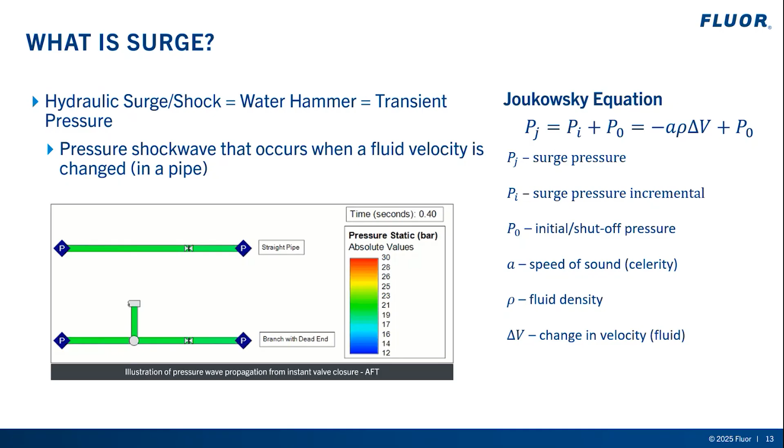Thank you, Phuc. Surge events like fluid hammer and vapor collapse aren't just theoretical risks. They cause real-world safety incidents and financial losses, especially in complex pipeline networks with varied configurations. But here is the dilemma.

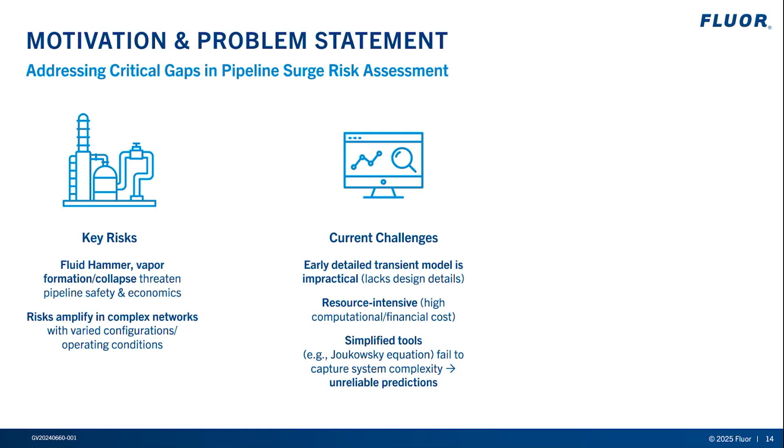Early design stages are when surge risks must be identified, yet this is when we lack detailed data for full transient modeling. Running high-fidelity simulations for every pipe section is prohibitively expensive and time-consuming. So engineers rely on simplified tools like the Joukowsky equation, but this ignores system complexity, leading to unreliable surge predictions and band-aid mitigation strategies. Our core question is, how can we rapidly pinpoint surge-vulnerable zones during conceptual design without costly modeling?

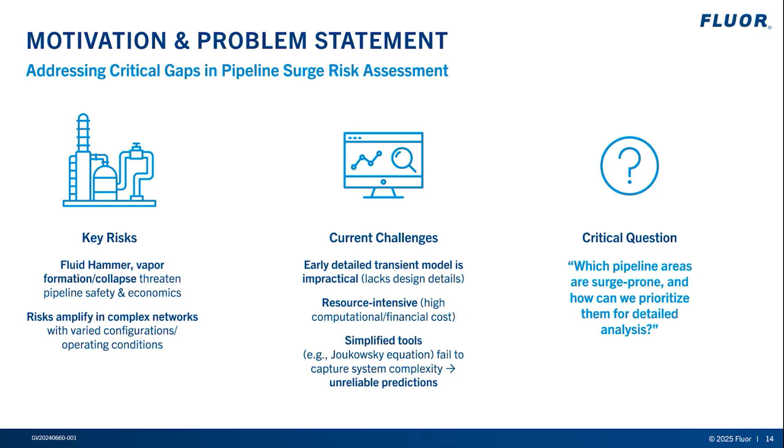We try to bridge the gap with a deep learning tool trained to predict surge magnitude and location using physics, not guesswork. Unlike traditional methods, our AI accounts for interactions between critical parameters, such as diameter, valve dynamics, and network layout, delivering holistic screening. Now, why distillation?

With field surge data, it is near impossible to capture shock waves, and measurements are noisy. Instead, we generate high-fidelity simulation data based on hydraulic principles to train the AI. This avoids data uncertainty while transferring physics-based knowledge. Think of it as teaching the AI with precise digital twins rather than flawed real-world observations. So let's highlight again here. What we mean by distillation is that we are transferring knowledge from high-resolution simulations, our teacher, to the lightweight AI model, our student.

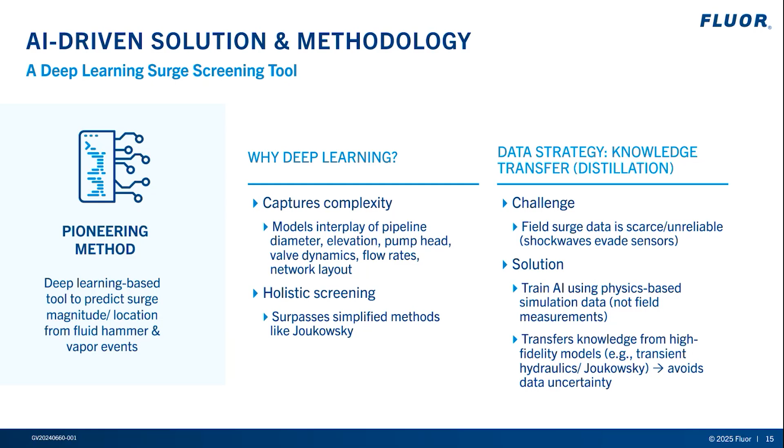Again, why simulations? Fluid hammer events last milliseconds. No control system reliably records them. Simulations give us clean, controllable data. Let's validate with a focused case, valve-induced surge. We reduce the complexity using two non-dimensional parameters: tau, which is the valve closing time versus sonic wave reflection time, and eta, which is the simulated surge pressure versus Joukowsky prediction. Our simulations reveal eta and tau share a polynomial relationship.

Crucially, we quantified uncertainty propagation. Variations in tau directly impact eta's reliability, with the equation shown here. This isn't just math. It tells us how confident we can be in AI prediction when real-world inputs are fuzzy. Next steps: scaling this framework to include pumps, network effects, and more parameters.

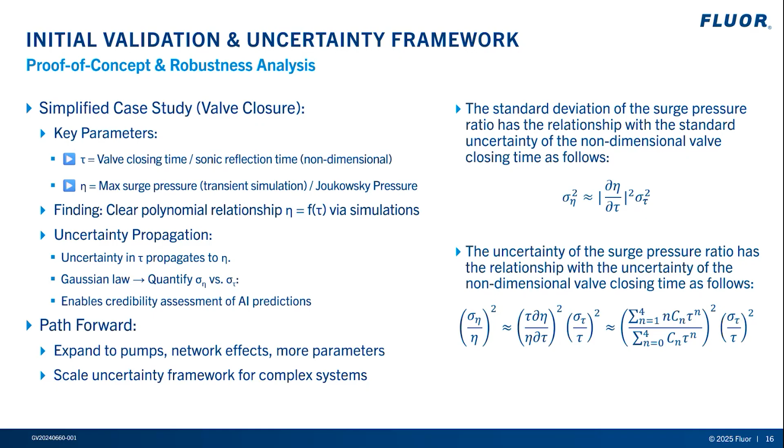Let's highlight again here our key technical contributions. First, we utilize non-dimensional parameters based on the rule of similarity. We introduce tau, a non-dimensionalized valve time that enables us to generalize across pipe length, diameter, and fluid properties. Second, we utilize the Gaussian law on uncertainty propagation. The Gaussian law shows how input errors propagate, which is vital for judging AI's real-world credibility.

Now back to you, Phuc.

Thank you, David, for our motivation and methodology. Next, moving into our simulation and development, going from what we do in the simulation model to how we develop it in our deep learning tool, then to present our findings and validate the accuracy of our machine with uncertainty propagation. Lastly, to describe the study's constraints and set up for our future work.

For our simulation modeling, Synergi Pipeline Simulator, or SPS for short, by the company DNV, is the simulation software of this study. SPS is a robust, steady state and transient analysis software for pipelines. It is widely accepted and in many cases preferred within the industry. The depiction shows a very simple and very basic setup within the model. You have an origin or source of fluid connected to a pipeline with a valve at the end of the line leading to the destination as the reservoir or sink.

In this study, we consider a typical pipeline with common parameters of design. The pipeline is transporting water with diameter set at 20 inches, length at 20 miles, wall thickness of 0.25 inch, inlet pressure at 750 psig, outlet pressure at 150 psig, because pressure moves from high to low. Material of carbon steel, and the only variable we are considering is the valve closing time.

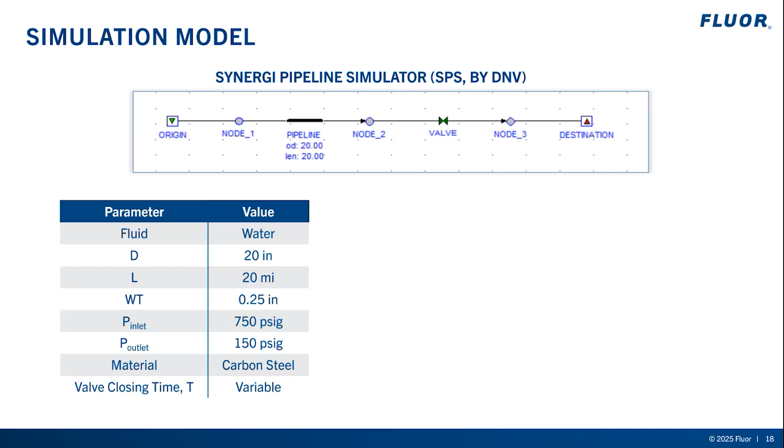We study 4 types of valves: ball valve, gate valve, linear valve, and globe valve. Why? Each valve has a different opening and closing characteristic, which is the major factor of flow control with respect to time. The steeper the slope, the more aggressive closing of the valve. These 4 valves were chosen based on the most common types of valve in operations. From the simulation, we generated 10,000 data points for each of the 4 valve types, for a total of 40,000 data points. I will now pass it over to Liang for our machine learning development.

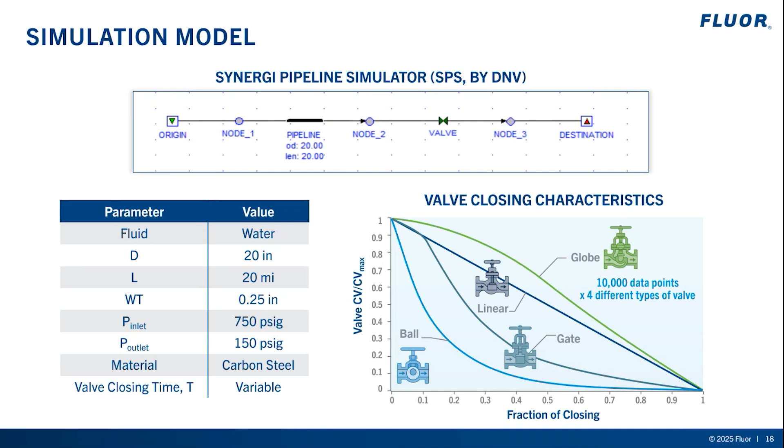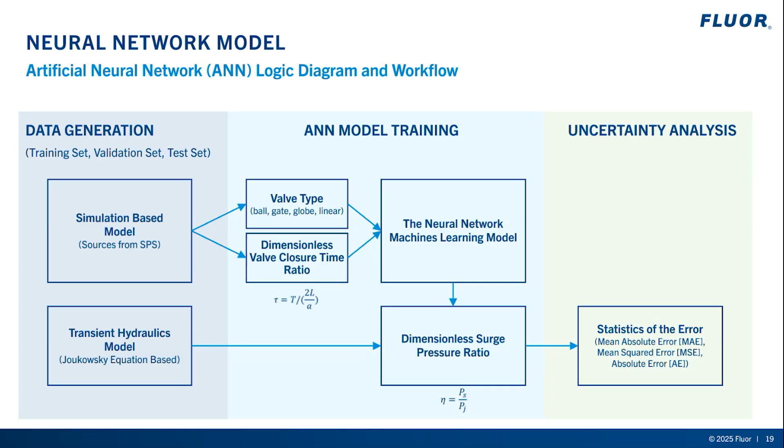The second phase shows how the ANN model is built and trained using the input data mentioned by David and Phuc in the previous slide, specifically the valve type and the valve closure time ratio. The model then predicts the surge pressure ratio as an output. Finally, the uncertainty analysis phase demonstrates how the trained model produces error statistics using loss functions. This enables us to evaluate and refine the model effectively, and also supports further uncertainty propagation analysis.

Okay, so we've already mentioned the ANN several times, but what exactly is an ANN model? It is not a new concept. In fact, it has been widely used for many years across various fields. The model is inspired by the idea that the human brain's functioning can be mimicked by creating the right connections, similar to how biological neurons work in animals and humans. As shown in this slide, the diagram illustrates how a single neuron receives a signal, processes it, and then passes it on, both in biological and artificial contexts.

The artificial neurons follow the same principle. It receives input signals, processes them, and applies different weights to each input before passing the results to the next connected neuron. So now when we talk about the network, we are referring to a system made up of many interconnected artificial neurons. In a typical AI model, a group of neurons are linked together to form the network. Each connection between the artificial neurons functions like a synapse in a biological brain. In the next slide, I will show the actual ANN model we used in our study with selected connections highlighted.

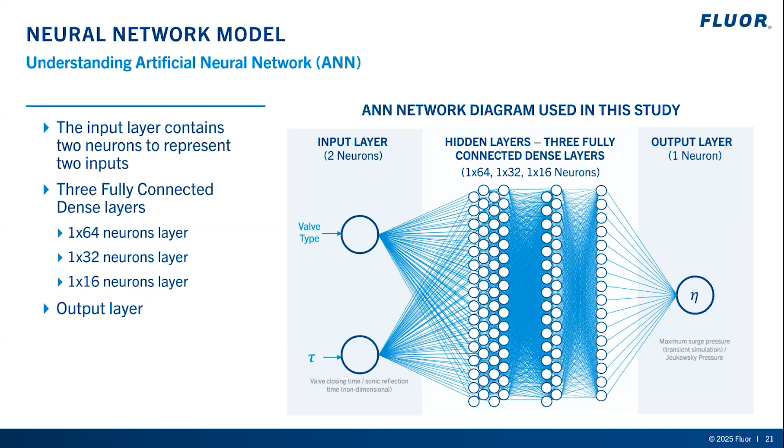The diagrams on the slide visually illustrate these layers and their interconnections, helping to show how data flows through our network. So there are some rule of thumb methods of determining the size and architecture of the neural network for different applications. However, in practice, selecting the right architecture often comes down to trial and error. A common approach is to begin with a simple model and gradually increase its complexity by adding more and more layers and neurons. The model's performance is then evaluated using metrics such as mean absolute error, mean squared error, and R-squared.

Then the model is built and executed within the TensorFlow environment using Python. TensorFlow is a powerful open source library designed for numerical computations and is particularly well suited for machine learning tasks. While TensorFlow is used here, there's no strict requirement for the development environment. Other platforms and tools can also be used, each with their own pros and cons. As mentioned earlier, the goal of the code is to create, train, and validate the AI model and predict pipeline surge pressure resulting from valve closure events.

Before feeding data into the model, it must be pre-processed. The full data set is then randomly split into training, validation, and testing sets to ensure the model can generalize well. To simplify the process of building and training the neural network, we use Keras, which is a high-level API built on top of TensorFlow. The model itself is a multi-layer perceptron, which is a type of feed-forward neural network. It consists of an input layer that receives the two features, followed by the three hidden layers with 64, 32, and 16 neurons, respectively, as mentioned in the previous slide. And we have a single output neuron that predicts our target.

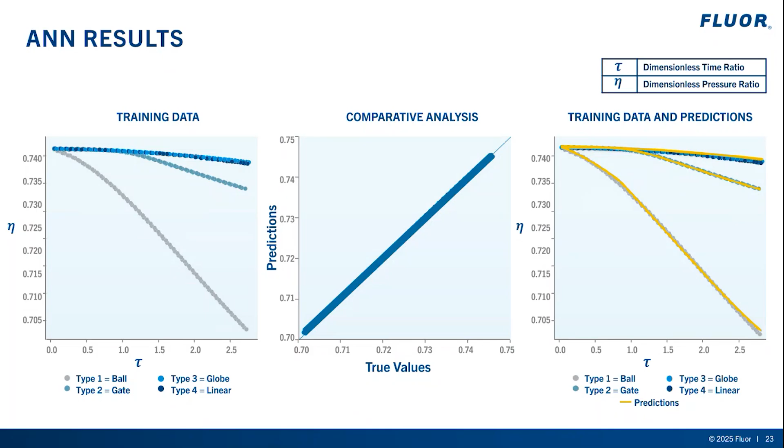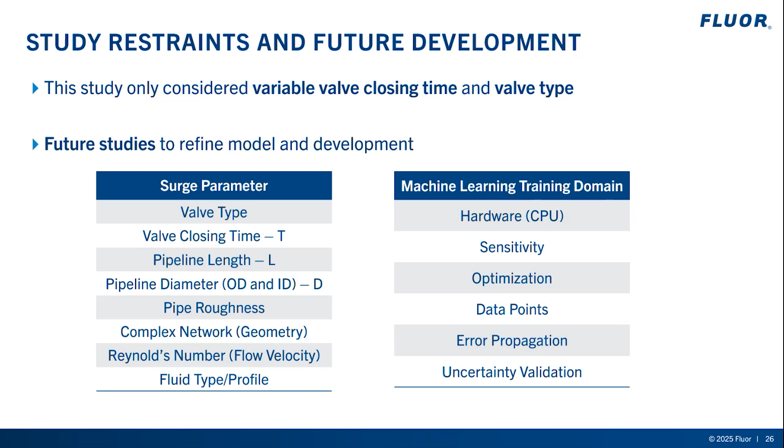Well, why is this important? Modern industrial facilities and processes are getting more and more complex by the day. Fluor has taken on many projects that include numerous pipelines, including the Petronas Rapid UIO project in Malaysia, as well as the KNPC MAB2 project in Kuwait.

Well, what if the facility calls for 100 pipes, or 1,000 pipes, or more than 10,000 pipes, each carrying different product, each with unique dimensions and operating conditions, each with many controlling valves, all subjected to thorough analysis for compliance.

We can now leverage the power of computation and machine learning to have an idea of what to expect, whether a pipeline will even need surge mitigation or not, or which pipeline should require more effort and analysis. The goal is to improve the delivery of our analysis with respect to our time to market and quality. If we can improve our results quality and our methods efficiency, even by 15 or 20%, it would be our own failure not to do so.

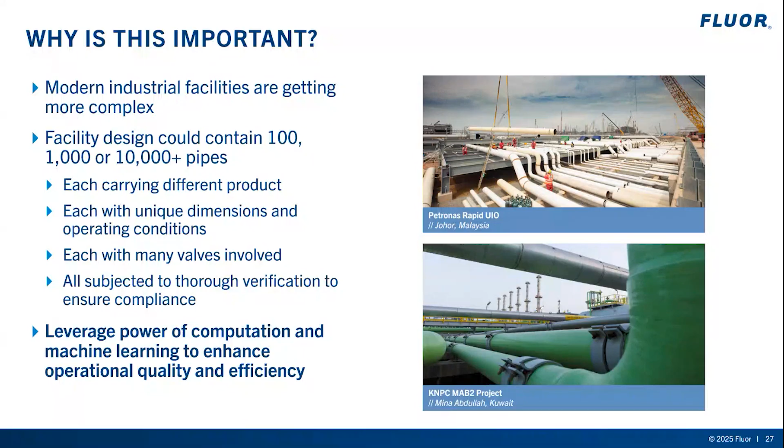Finally, we come to our key takeaways. So, what did we gather from this study? We successfully implemented the first iteration of machine learning on surge screening. Our machine learning model can predict correlating non-dimensional ratios for surge pressure and valve closing time for different types of valves with low deviation.

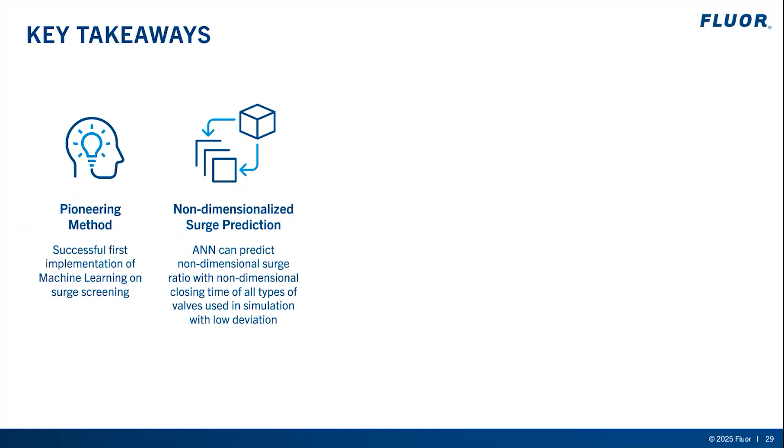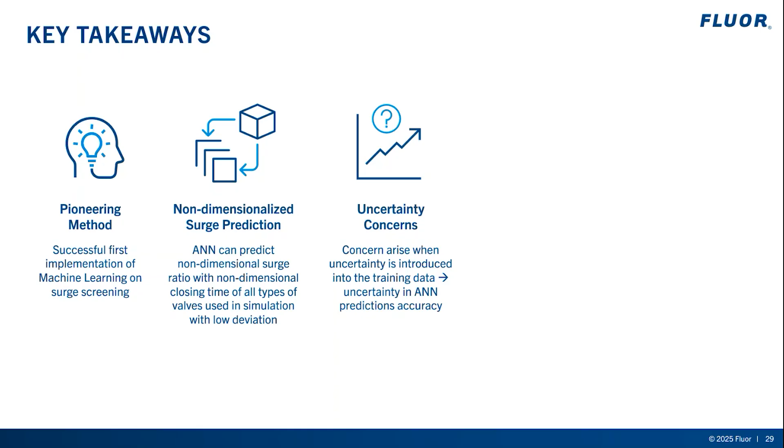However, some concerns arise when uncertainty is introduced into the model's training dataset, as expected. The model's predictions will also see some uncertainty and inaccuracy as well. There is much more to be understood on how the model algorithm handles uncertainty and the correlation of uncertainty as it influences results, which is not clearly defined mathematically.

Our first step of experimenting with machine learning in pipeline work has proven to be quite advantageous using theoretical data. Fluor will continue to develop this as an in-house tool, depending on IT governance review and funding, to leverage efficient surge screening and our capabilities in the AI and machine learning world.

To sum it all up, I will leave you with 2 questions and answers. Can the tool be deployed for project use? Well, not quite. This has not been used commercially yet and won't be for a good while. There's a lot more to be tested and a lot more to be understood based on what we learn. Beyond that, before we even think about deploying the tool, we need to protect and barricade all data it will generate to ensure security and trust. Risk proofing will be a major development that is required in order to maintain integrity and confidentiality.

But are we on the way there? We are certainly one step closer to where we want to be.

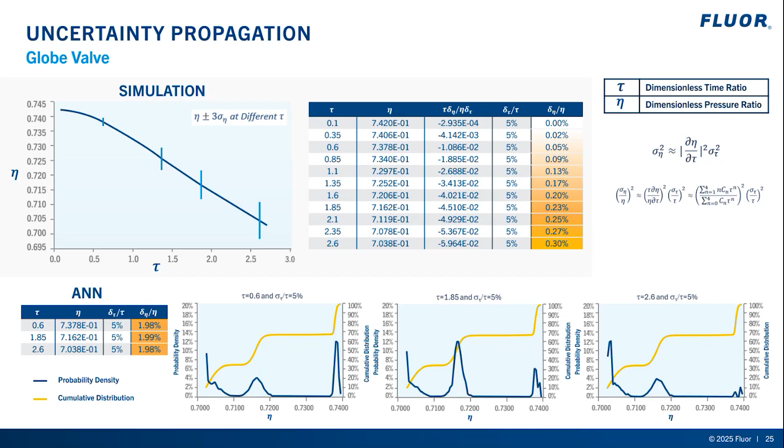5% is the uncertainty that we introduce. So we're taking it as deviation from the tau value. So let's say 0.1 tau. We fed it not just 0.1 tau. We fed it 0.095 or 0.105 tau. So that's where the 5% deviation comes from. So we want to introduce a range of tau for the machines to pick up on instead of just training the rigid 0.1. Yeah, that 5% is the standard deviation of tau divided by the mean value of tau. Yeah, it's 1 sigma. All right, excellent. Thank you both very much for that.